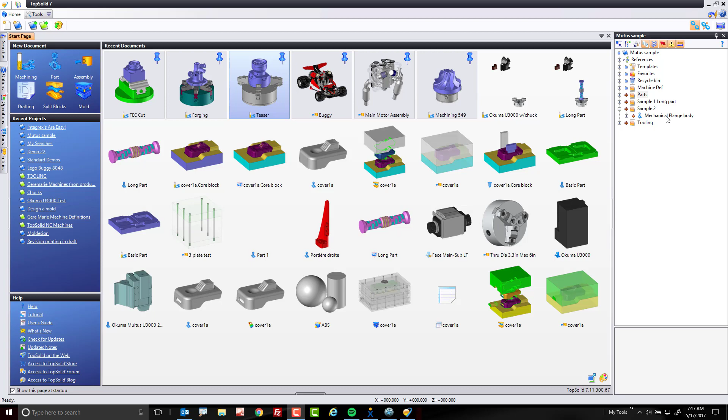Welcome to TopSolid 7. In this video, we are going to look at programming a part on an Okuma Multus U3000. The part in question that we're going to program is going to be this mechanical flange body. You can see there's operations all over the place that we have to deal with, and we're going to do our best to program all of these operations live together.

The first thing that we want to do with this part is we want to create what's called a machine part setup document. In a machine part setup document, this is where I get to tell TopSolid what the part to cut is and what the stock condition of the part is going to be. In this case, I just want a simple piece of cylindrical stock, and I'm going to add a little bit extra material on the left side. Perfect. I'm going to save my work.

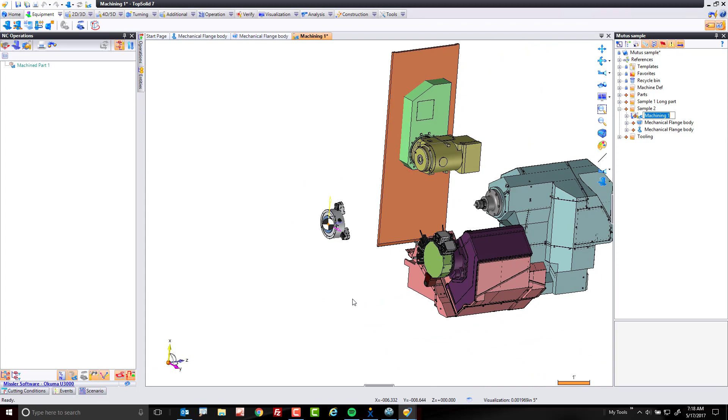Next, I'm going to start a new machining document. Here I'm going to choose my Okuma U3000 with chuck template. When I do this, you're going to see that my CAM file opens, and in here is my Okuma U3000. Now in this case, I've done a little bit of prep work ahead of time. I have my standard holders that I use already on the machine. I have some turning tools and some of my turning holders for my milling holders down here. I have them empty, waiting for the tools that I need to use.

Cool. Now I'm going to zoom up here on the chuck, and we're going to take this mechanical flange body, again the machine part setup file for those of you watching at home, and we're going to drag and drop it into the model. I'm also going to use stock faceted mode here because it's just a little bit faster on the calculation. I'm going to position this off of that axis there. Perfect. I'm going to take that to this plane right here, and we're going to go ahead and offset that as well. Let's go back maybe that 1/2 inch. Perfect. That looks good. Maybe we'll go even a little bit more.

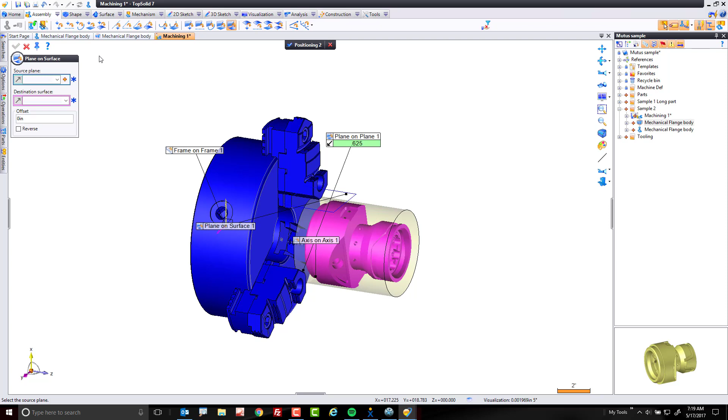How about 5/8? Nice. Now, from there, I'm going to take my plane here to this face. That'll close the jaws. And the last move I'm going to do is I'm going to orient that face to my x-axis. This way my part is positioned exactly as I need. Nice. Like that, we're now ready to start machining this part.

In this first step, we're going to start by turning down the front face of the part. To do this, I'm just going to select the front face of the part, right mouse button click, and choose roughing from the turning section of my contextual menu. Once I do this, TopSolid's going to generate what we call the spun profile. Here it's going to calculate the real turning profile automatically for you. Depending on the part complexity, it may take a second or two, but now we have it.

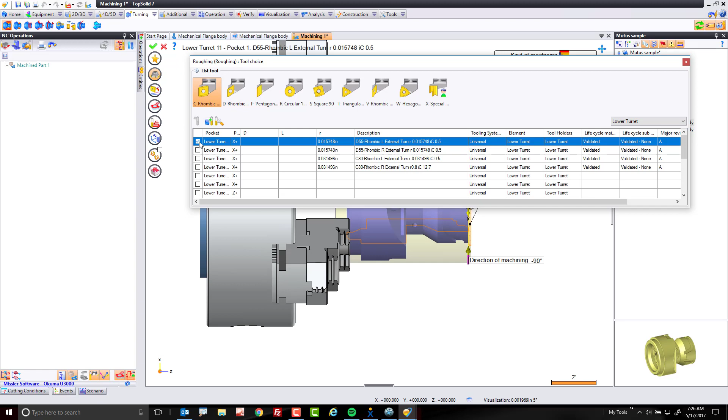Now here it also chose a neutral tool in my B-axis upper turret because why not? We haven't done any operations yet, it doesn't know really what we want. So here I'm going to change to our lower turret, and I'm going to choose this first tool. Now that I have the tool selected, I'm going to click my tool button here. I'm going to flip this down a little bit so we can see. And now you can see a preview of the tool path coming in.

Next, I'm going to change my depth of cut. Maybe I want to take a 30 thousandths depth of cut. Nice. Just double click, make the setting change, let the tool path regenerate. Maybe I only want to leave 10 thousandths to finish later. Cool. Again, double click, make the change, let the tool path regenerate.

Let's go set some feeds and speeds as well. Here, for example, I want to work in constant surface feet. So I'm going to work at 750 surface feet and how about a 15 thousandths chip load. And I'm going to set my maximum spindle speed for this to be maybe 3,000 in this case. And like that, my roughing is now complete.

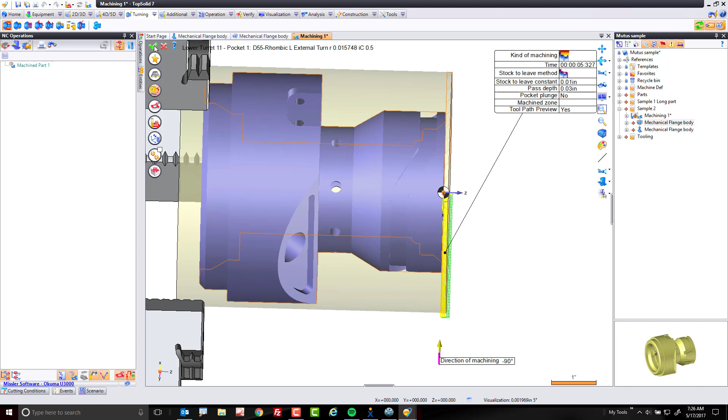The next step is to let the software go into a simulation mode. And here you can see we've indexed the turret and we're bringing that forward, and you can see the first roughing cut is complete.

Okay, the next step, what we're going to do is get out of the simulation from the previous step here, and we're going to go ahead and turn down the length of the part. Now, when we do this, we're going to use the upper B-axis. Not for any other reason than we can, and to show you different ways of working within TopSolid.

So I'm going to start by selecting the face I want to start turning at, and then using the Alt key on my keyboard, I'm going to select the end face that I want to finish turning at. And I'm going to right click and go to roughing. Now, what TopSolid's going to do in this case is it's going to pick up the roughing, it's going to pick up our tool, and it's going to generate our preview.

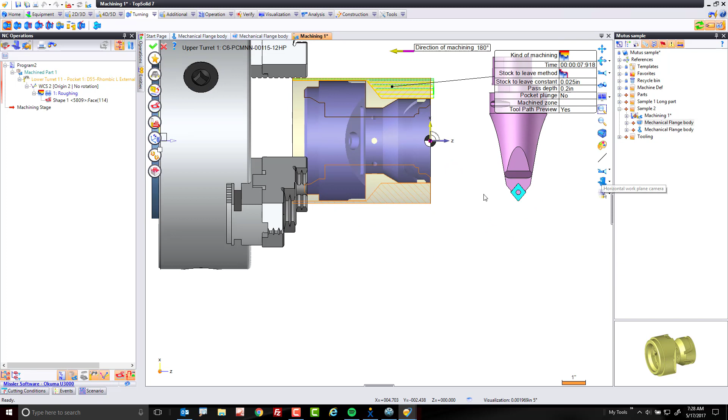Now let's look at our preview for a second because this is kind of neat. Here what's going to happen is we are going to turn down the part, and notice based on the tool orientation, this is showing the real condition of the part. From here, what we want to do is we want to maybe take this B-axis head and rotate it 45 degrees. Nice.

So to do that, I'm going to come into my comment section. And down here, these are just standard angular solutions. You can see as I click this, it turned the tool to have the insert facing the other way. Maybe what we want to do is set this at 45 degrees instead. So let's hit New Angular Solution, and let's go to B, and let's just simply type 45.

Maybe I want the insert facing forward in this case. Maybe I want it facing back. The choice is yours, and every change you make, you get to see dynamically over here to the right. And the reason we get to see this dynamically is because in this option here, I have Show Machine Preview in Position activated. I'm going to green check mark that.

Once I validate this, now the software is creating the angular solution required to do turning with my B at 45 degrees. Now we have another thing that we're going to have to do here as well. We're going to have to make sure to set the correct driven point of our tool. But first, let's look at our updated tool path. This is looking good. Now I'm going to go into my settings or my cutting conditions here. Of course, I'm going to reuse the same cutting conditions as before.

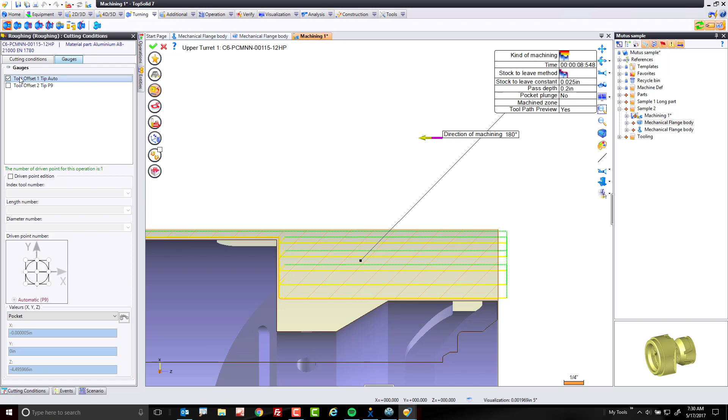So let me show you a quick trick for that. I can just drag and drop that over to here. That's going to copy all the cutting conditions. And from there, I'm going to come into my gauges. And now I'm going to do some magic here. And what I want to change basically is this. You can see how the tool is, and you can see where my cursor is holding onto the tool.

I want to change the driven point of the tool because I need it to be that theoretical intersection of the cutting edge in X and in Z. To do this, I'm going to start by duplicating the driven point and changing to my duplicated point. The reason I do this with a duplicated point is this way I always have the standard system points available to switch back to whenever I need to.

Okay, in the next roughing step, we're going to go ahead and rough out this area here. To do that, I'm going to zoom up, select my starting face, rotate my part a little bit, hold the Alt key, select my ending face. Right click, roughing again. Now, to start with, the software is of course going to try to rough it with the previous tool, which is that neutral tool that we had at 45 degrees.

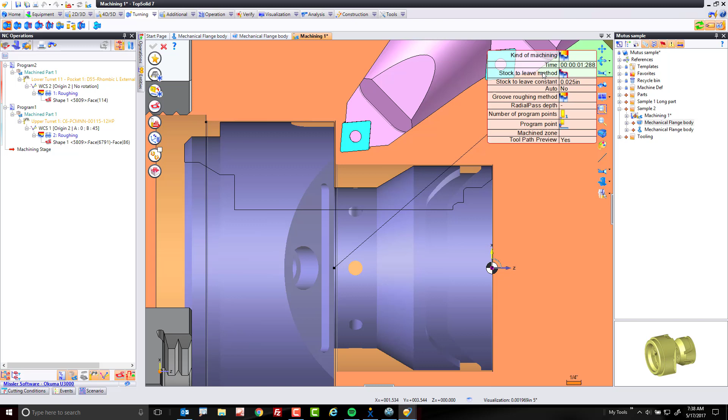Now, here, what we're going to do is first switch to the groove roughing method up here. And now I'm going to switch tools as well. When I switch tools, I have another tool already in here. This is my standard 4mm groove roughing tool. Go ahead and look back. Now, the software is maintaining that B-axis angle for us.

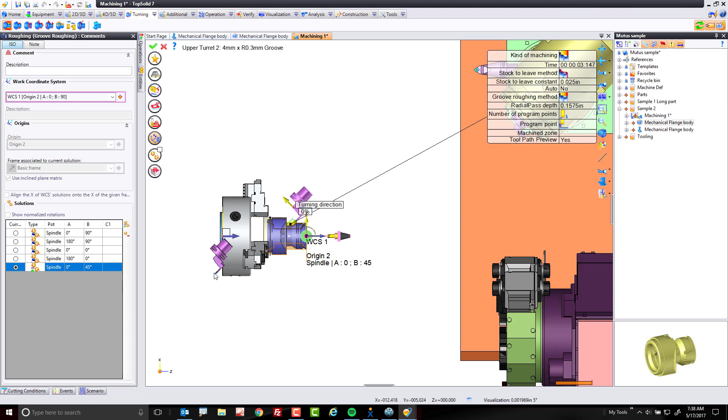So we're going to come into here first, and now we're going to set some options. I'm going to zoom back out here for a sec, and I'm going to look at being with my B at 90 and my A, or orientation of my tool, at 180. You can see it here like this. This way, I'm using the tool offset to the correct side automatically.

Next, I'm going to copy my feeds and speeds. Again, I'm going to use something similar, so why not? I'm going to copy those over.

Let's go look, make sure everything came in the way we want. 750 surface feet, 0.015 per rev, max RPM of 3,000. If we look at our gauge points, we have a left and a right gauge point because it's a groove tool. That's perfect. We can come in here and we can play with any type of groove roughing we want.

Now, we can use multiple control points. Okay, I can program with the left point and the right point. I can drive only by the left, only by the right. Of course, the choice is yours. If I go to the strategy tab here, I can choose the type of roughing methodology we want, including trochoidal roughing. Why not? Let's have a look at that option.

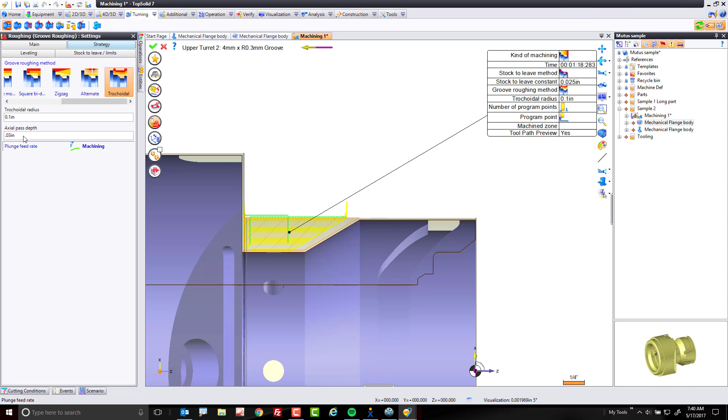With trochoidal roughing, I'm going to go ahead and set my radius and set my axial pass depth. Maybe here I only want to take 30 thousandths depth of cut. If I zoom up on the tool path, you can see it's going to lead in, it's going to cut, come back, and it's basically going to keep that tool engaged in cutting in a continuous fashion. Perfect. Like that, this operation is done. Let's let it update the stock model, and let's maybe take a look at the simulation.

Cool. Now, as I zoom out here, you can see the tools coming in. Now, during a simulation like this, what's important too is the chuck, right? So if I look here, I can actually turn on the rotation of the chuck. And why would we do that? We do that because we want to see if there's going to be a collision at that moment of turning, right? So let's turn this thing on and let's see what happens here.

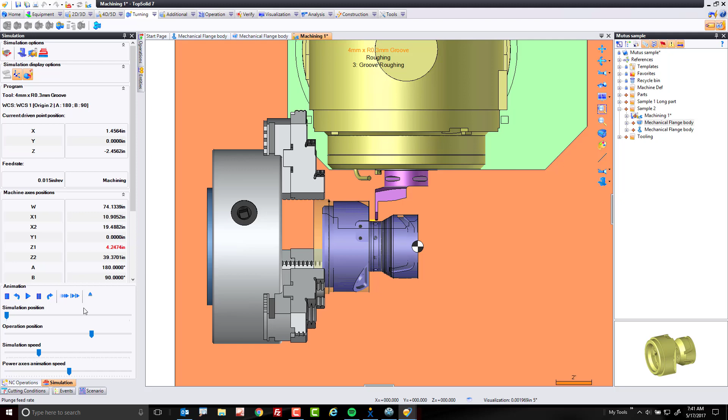So we're coming down, we're looking, and that gets close, and I'm going to go ahead and pause it. That gets close, but it never actually hits. Pretty cool, huh? If it did hit, this software would tell us about the collision. Awesome.

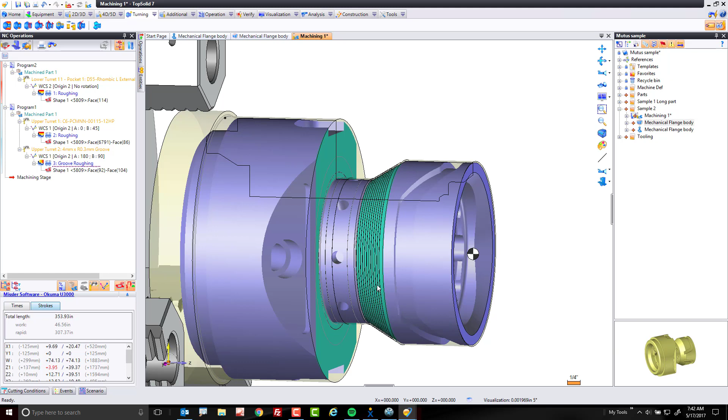Welcome back. In the next step, we're going to go ahead and finish this groove. I mean, we have the groove tool in the spindle right now. Why not do that? So here I'm going to, again, select, Alt select there, and here I'm going to go down to finishing. Now, just to be different, here's what I'm going to do. I'm going to change the type of finishing we want to profiling. Okay, and here you can see again it grabbed that tool, but just to play with the lower turret, I'm not going to use this tool.

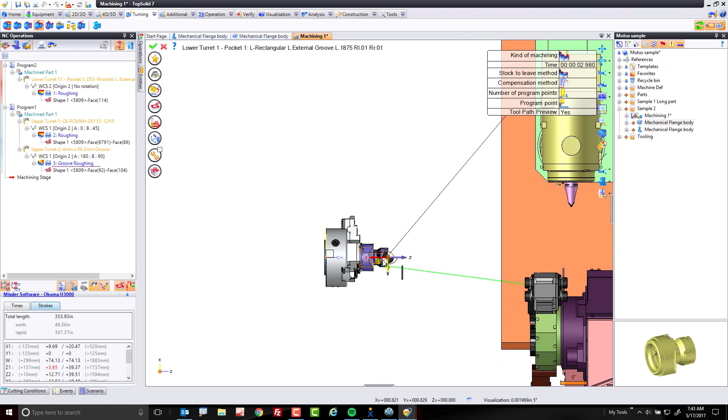Instead, I'm going to come over to my tool settings. I'm going to say, you know what, let's use our lower turret. And in my lower turret, I want to use that tool there. And of course, that's going to be the tool on the left side of my turret, and it's going to come in this way. Now, the tool path is offset here because on the machine, this is a slant bed lower. So what we would need to do, let me turn off the tool display here, is if we look at this, we can rotate down and you get a better idea of what's happening.

Now, in this case, what I'd like to do is easy to understand. I want to program from two directions at once. So the tool is going to lead in, come down, come off, lead in, come down, come off. Cool. And from there, I also want to program by 2 points. Why not? This is for highly accurate tool path.

Let's go set our feeds and speeds as well. Again, we want constant surface feet. Here I'm going to go up to maybe 800 surface feet, and I want a nice finish, so 0.005 per rev. I'll let this thing max out at 4,000 RPM. And we're done. And again, we get to see that simulation. Here the lower turret is indexing. It's going to approach, right? And now it's going to do its thing. And you can see the perfect little cut. Nice.

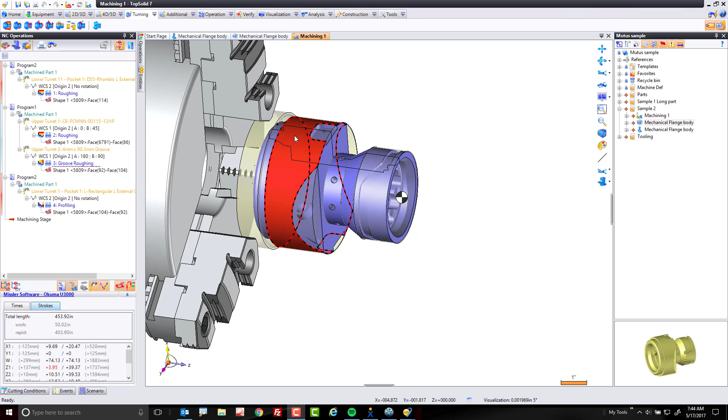Okay, in this next operation, we're going to go ahead and finish turn this front face, and this face. Okay, so here's what we're going to do. I'm going to start by selecting this to here. I'm only going to do that to begin with, and you'll see why. I'm going to go to finishing. I'm going to go ahead and set myself back to the B axis of 45 because I want to go back and use our B axis. Why not? Now if I look at this in turning view, you can see good, looks good.

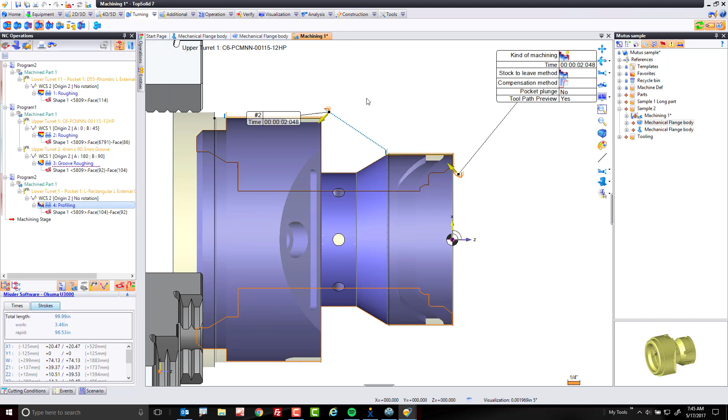I'm going to go to my geometry selection here, and I'm also going to add to it this face. Why not? So here I'm doing my cut, I'm coming in, doing my cut. I want to use similar feeds and speeds as that, so I'm just going to drag and drop them, and life is good. Like that, I've now finish turned everything. And again, we go into the simulation, everything's going to come down, and away we go. Nice.

Okay, so at this point, we have done a lot of the turning of this part, right? We've used the upper turret, the lower turret, we've done a few operations, and now what I'd like to do is I would like to check how all of this is going to look, but with synchronization. And that's the important point here. So what I'm going to do is I'm going to switch to the final machining stage, and now I'm going to bring up my scenario down here.

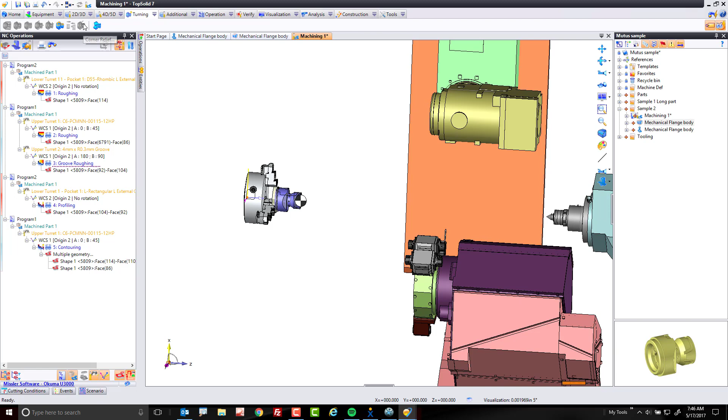Now, if your scenario is not visible, like mine is, you can always turn it on by going to your 7 icon up here, going to view, and activating the scenario. Now down here, these are all of our various operations. Now here is the piece of awesome that I'm going to show you. I'm going to right click in here and choose automatic layout. And like that, TopSolid has now set all of the synchronizations dynamically.

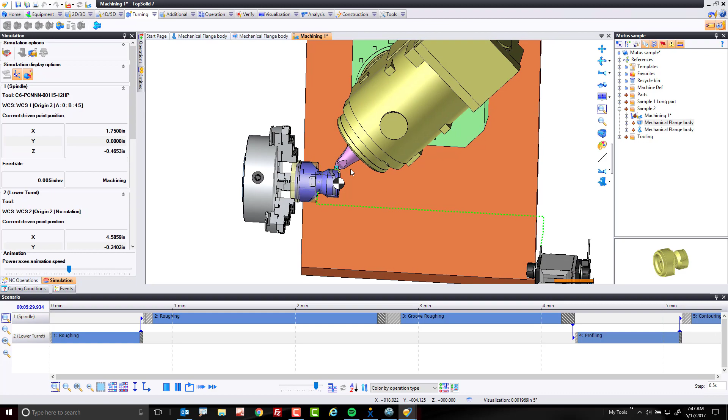So now what we can do is we can just hit play. And when we hit play, you can see every operation that's going to happen in the order in which it's going to happen. And we can speed that up, you can slow it down, you can do with it as you want, you can rotate, pan, and zoom during the whole process. Everything is good. There's my groove roughing, nice. Here is the groove finishing, and here is my finish turning. And like that, our synchronizations look good. I would say that's a successful test.

All right, now that we have the majority of our turning done, now what we want to do is we want to go ahead and do some milling. And maybe the milling features we're going to do are a little bit different. So what I'm going to do first, I'm going to minimize my scenario. I can always bring it back. I'm going to switch back to machining stage, and I'm going to continue working on this part.

Now, to begin with, what I want to do is I want to mill out some of these features here. So I'm going to start by just selecting this face here, right-clicking on it, and going to end milling. Now, when I do that, the software is going to find the area to machine. It's going to propose it as an open pocket, which makes sense because guess what? It's an open pocket. And now we need to go find a tool.

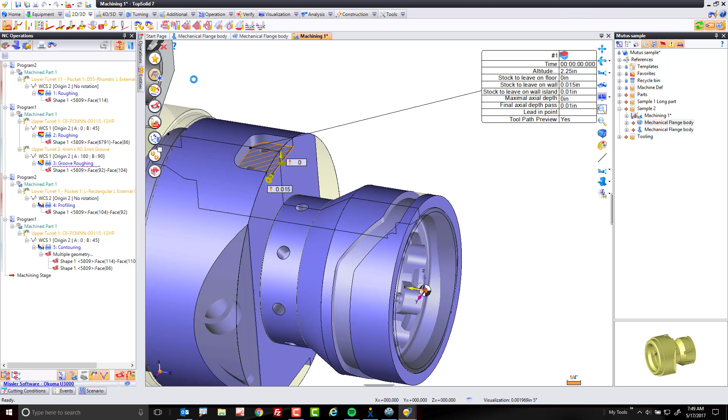So I'm going to build a tool on the fly again just to show how simple it is to work with tooling in TopSolid. Here, I want to use this style tool, or maybe, you know what, I want to choose from a template. Maybe I want to use this style tool instead. So double click, perfect, that's done. And now here what I want is, how about a 3/8 diameter end mill? That looks good. Maybe here we want the 3/8 diameter end mill to have 3/4 of an inch of flute. Maybe it's 2 3/4 long.

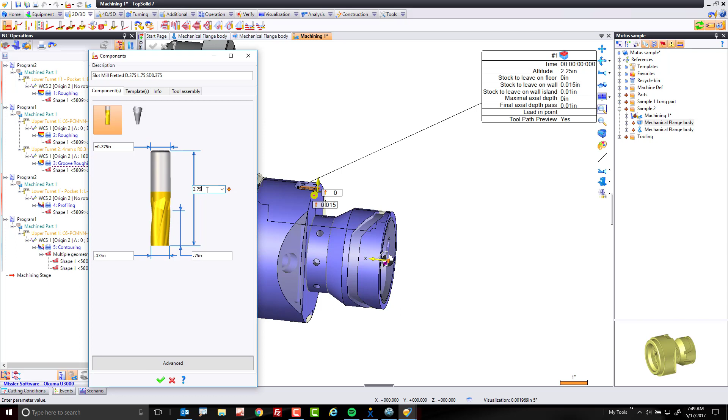If I go to my advanced settings here, maybe this is a 4 flute tool. Great. I can go here and I can make changes to this as well. But most importantly, I'm going to come here and I'm going to play with my gauge distance. This is how far that tool is going to stick out. For example, here I want this to stick out 1 inch by default. Perfect. Let's go back to here really quick and let's maybe set some values for our holder, and you can see you can set this in any order you want. You can play with this all day long and then click OK and you have your tool.

Awesome. Now as soon as we have our tool, of course since it's TopSolid, we have toolpath. So let's make some changes here. I'm going to go make some feeds and speeds settings. I'm going to say, you know, I'm going to run this at about 3,500 RPM and 50 inches a minute, maybe some jet coolant. That's awesome.

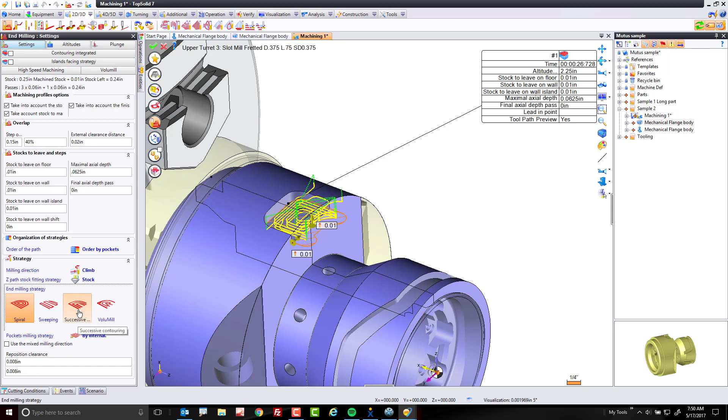I'm going to come down to my settings here and I'm going to set this to be maybe a 40% step over, and maybe we want a 1/16 inch depth of cut. Cool, why not? Don't need a spring pass. And maybe here we want to leave this with 10 thou stock on the floor, 10 thou stock everywhere else. Awesome. Like that, everything is good to go. Maybe last step I'm going to make is I want to use successive contouring. Cool. And away we go.

And like that, TopSolid is going to update the stock model. We're going to see our simulation. It's going to rotate the B to the right angle. It's going to approach. I'm going to speed that up a little bit. Notice in this case, the spinning axis is the tool. Kind of cool. That way we can check even when the tool's spinning for collisions. Kind of nice. And away we go.

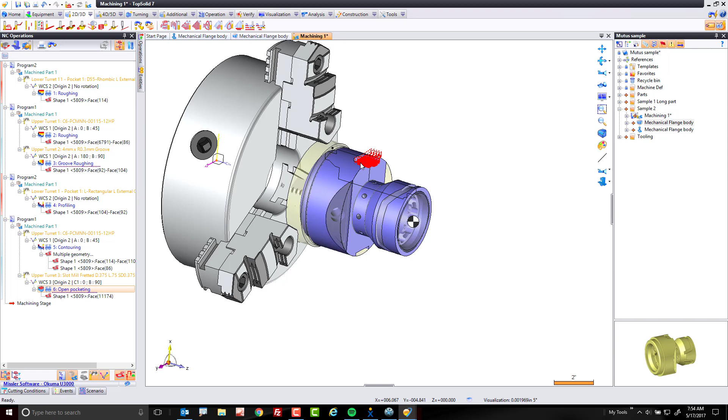Welcome back. In this next video, what we're going to do is take this toolpath and apply it down here. But how we're going to do that is going to be kind of cool. What I'm going to do is hold the control key down on my keyboard and just drag and drop that down to that face. When that happens, the software automatically finds the correct angular solution and creates the toolpath. I mean, that was easy, right?

Let's drag and drop onto this face and see what happens. Here now the software is going to check against the kinematic definition of the machine. It's going to find the angular solution and it's going to create that toolpath. You know what? While we're here, let's rough out that pocket as well. I mean, why not? We have the end mill in the spindle. Let's do it. So now we have the pocket of that angular solution.

And then next, let's take that toolpath, bring it over to this incline face. Cool. And then of course, we're going to drag and drop it onto the next face as well. And really what I want you to pay attention to is the fact that I've just programmed 5-6 operations in a matter of a few seconds on a 5-axis mill turn machine without worrying about anything. I mean, that's just awesome, isn't it?

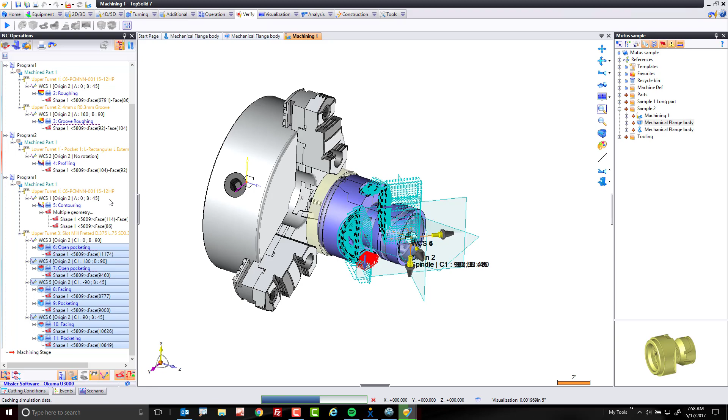Welcome back. In this next video, we're going to verify the toolpath that we just created. Now, in TopSolid, when you go to verify, there's a couple ways to work. First of all, I'm going to just window select all the operations I want to verify. I can right click on it and choose verify. What's going to happen is kind of cool now. We're going to load into verify, but our verify is a bit cooler than most softwares because our verify also includes the full machine simulation. And you notice it was one click to get into.

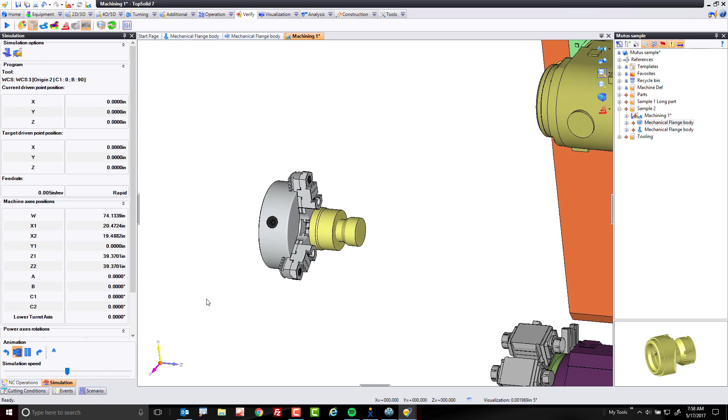The other thing to notice is the stock is coming in at the exact moment it would based on all the previous operations. Kind of fun. So let's hit play and see what happens. Now, if you don't see the machine in your verify, it's just because you don't have machine simulation mode active up here. So just click that button and away you go. And here now, you can see everything happening in real time.

And here, there's your pre-position move. Maybe I want to speed up the simulation a little bit. Cool. Now we're rotating, doing our thing, doing our thing. Perfect. Everything is seen in perfect simulated environment with zero collisions, zero problems, ready to go.

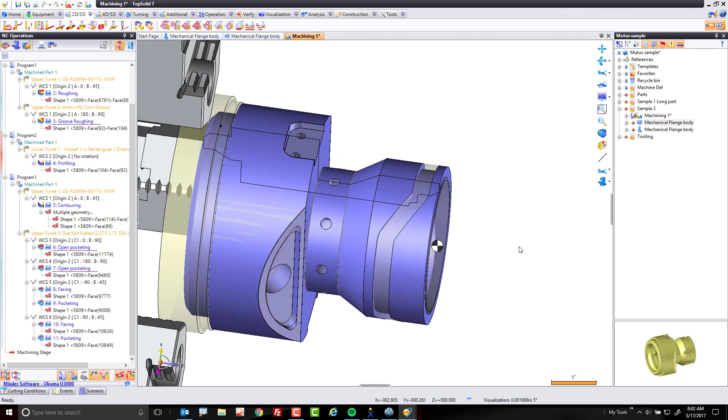Welcome back. All right, the next milling operation we're going to work on is going to be this 4-axis slot. Now, a lot of times in CAM softwares, they make machining harder than it really needs to be. I mean, if you think about it, a 4-axis slot is nothing, and it should be nothing. Now, here's how it works in TopSolid. You're going to select the face to machine, right click, and go, yes, under 2D to end milling, because it's still just an open pocket, isn't it? So I'm going to go to end milling.

Now, when I go to end milling, first thing I'm going to do is come in here and turn on multi-axis. Now, multi-axis became available because of the definition of the machine. The machine knows we can do 4-axis work, so TopSolid is exposing more functionality. Here, I'm going to switch to 4-axis radial mode, and as soon as I do, boom, I get some toolpath. Awesome. Now, here I need to go in and change my tool because, in fact, this tool just is too big to work on that part.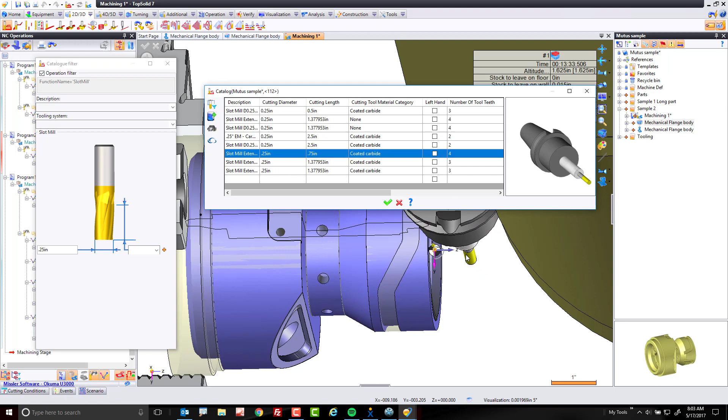So I'm going to come in, use slot mill, double click, and I'm going to search for a different tool. I want to use a 1/4 inch end mill. And here maybe I'm going to use this one here, nice little extension tool. Perfect. We'll go ahead and validate. And like that, you're now going to see the wrapped toolpath. Now, what's even cooler than that is, again, how quick everything is happening.

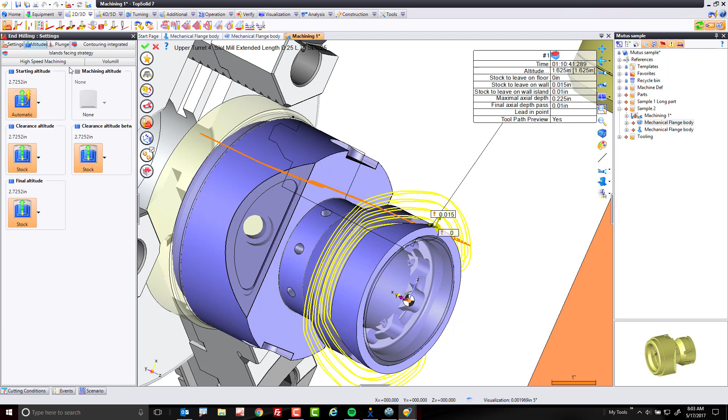Now, here's one little thing. You can see here it generates all the toolpath, but TopSolid doesn't know where to start with the toolpath, so we go all the way to the extent of the part. So here, you still got to be a little bit of an NC programmer. We're going to come into the Altitudes tab, and all we're going to do is change our starting altitude to be at a specific point. And what point? I'm just going to zoom up, and I'm going to find one of the endpoints here of the profile.

Like that, it's now going to measure that radially. I can come in and set my depth of cut, my step over depth of cut. Maybe I want this to be 60 thousandths. Maybe I want to leave 10 thousandths here, and maybe 10 thousandths on the wall.

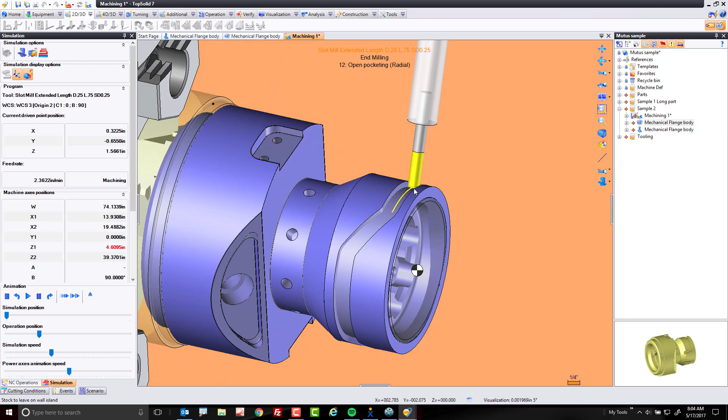At the end of the day, we've now successfully made a 4-axis toolpath. What's even cooler is that, of course, we simulate everything, so you get to see exactly what's going on and how. Notice it's plunging off the slot in the open area automatically, because that's just the right way to cut a feature like this. And the best part is you didn't have to think hard to get there.

Okay, next we're going to move on to some ID work. Before we do that, I'll go to my turning tab and turn on a really cool feature called part display. Here I'm going to enable turning preview, and set that to 90 degrees because I still want to see my finished part as well. Like that, I can now see the inside of my part.

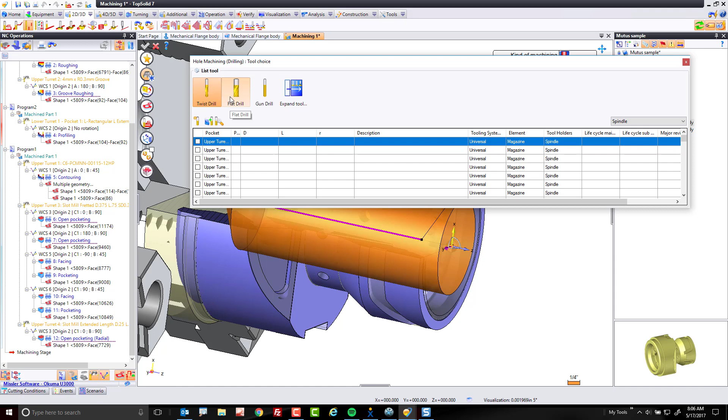So here I want to start by drilling down the center of this. I'll right click on this and go to hole machining. Right now it says this is a 2-inch bore. What I'm going to do is look for a flat drill, and maybe we'll build one. Why not? My flat drill - I don't want 2-inch, I want 1 3/4 inch. Okay, yeah, 1 3/4 inch is good. If I look at this straight on, that's got enough flute length in it, right? And that's going to go right to that depth, and that's good enough for me.

Perfect. Now, from here, we need to program it, right? So I'm going to set how I want this to work. Maybe I want this running at 500 RPM and 15 inches a minute with through-the-spindle coolant, so I'm going to turn on through-center coolant.

Next, I want to choose what's spinning - is the part spinning, is the tool spinning? You have the control right here for that. If I leave it like this, the tool is going to spin. If I choose this, the part is going to spin. Or I can double my feed rate and choose both the tool and the part. Now, this is specific to your machine - if your machine allows you to do this, great, choose it; if not, choose one of the others. In this case, I'm going to say this is a static boring bar and I want my part spinning. Like that, I'm going to click OK.

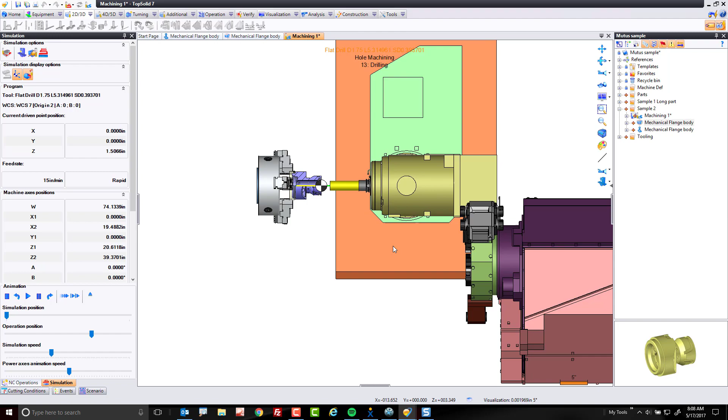And again, we're going to come in, do our thing, and come out. Now, maybe you're noticing that the way this approached was not very safe, because it's getting really close to our turret here. The turret was still safe, but maybe you want to change that approach move, right?

So here's what we're going to do. In the next video, I'm going to show you how to edit a link movement.

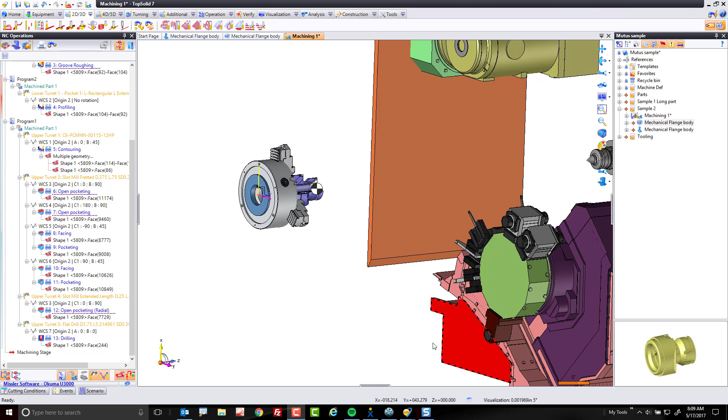Okay, now on the last cut, let's watch the simulation here. You're going to see that this is going to come down, right? And it looks like it's getting close to that turret, the lower turret I should say. If I pause that, you can see that it doesn't actually hit it, but it's enough to make most operators cringe. So maybe what we want to do is approach with the B-axis up here first, then come down. So how do we change that in TopSolid?

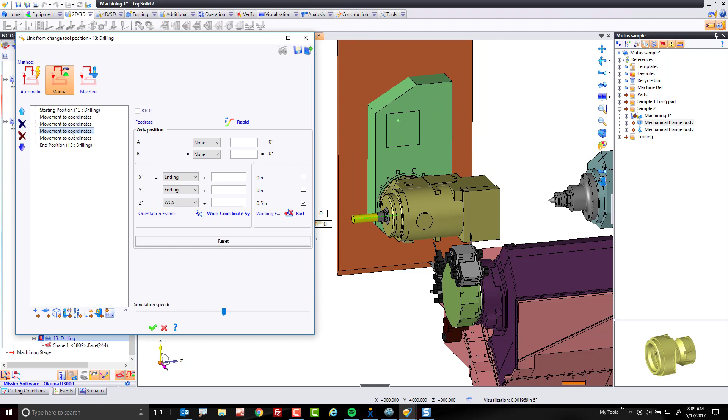Well, thankfully we have something called link movement editing. So here I'm going to right click on the operation, go to link movements, and say edit approach. When I do this, I'll turn off automatic mode and go to manual mode. Now here is that first move - it's setting A and B correctly. The second move is moving this down, then moving over, and when we move over, it's moving to a rapid plane. So why don't we just move that one up? Yeah, it was that easy.

Again, orient the part, approach in Z, approach in X, and finish. That was nice and simple - we didn't have to think too hard. Now if we simulate, way better approach move. And again, it's you that had the control to tell TopSolid what you want to do and how.

Okay, next I want to do some ID turning. Now in this case, I need an ID, and I need a turning tool that can reach down the length of this part, right?

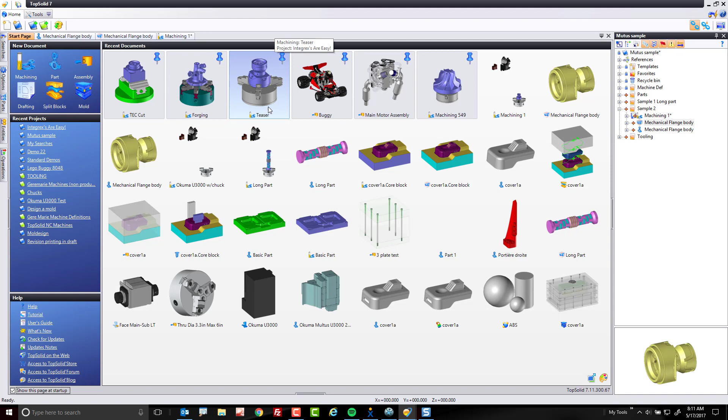Now I remember that I used this tool on a similar part in a different job. So instead of going through my database and hunting for the tool, which of course you can do, I'm going to go back to my start page and load the project where I know I have the tool already. Here I have one called teaser. I'm going to double click and lo and behold, it's the same part. The only difference is instead of it being on an Okuma, it's on an Integrex.

In this case, what I want to do is go to my tool manager. I'm going to find the tool in question. I'm going to make sure it's the right tool by turning it on visually. Yep, there's my tool I want to use. And here's what I'm going to do: I'm going to right mouse button click on it and choose copy. I'm going to hit the green check mark here.

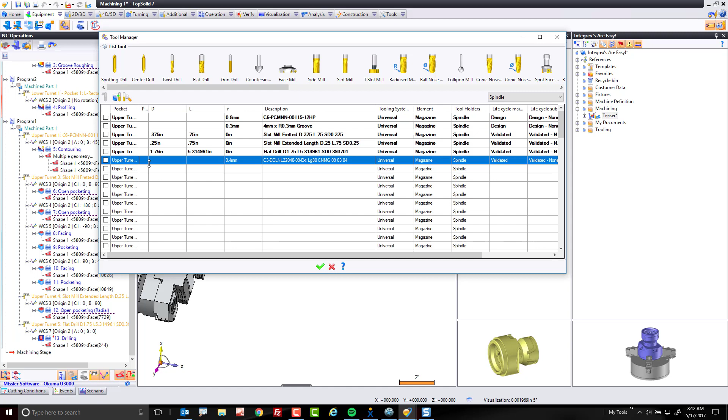I'm going to switch back to my current CAM project, go to the equipment tab, go to my tool manager, make sure I'm in the right place. I want to be on my spindle. Okay, and go to the next available pocket and choose paste. I'm going to choose no to that because I don't care about it being in the same pocket. And like that, my tool is now in this project ready to use.

Last thing I'm going to do, go back to this part and I'm going to close it because I don't need it open anymore. And like that, you just learned how to reuse tooling made in a different project and bring it forward into another project.

That was easy. Okay, next we're going to go ahead and do our ID turning. To do that, I'm just going to zoom up here, and I'm going to put myself in a turning view because it's just more fun. I'm going to choose this face, hold my Alt key down, choose this face, or right mouse button click.

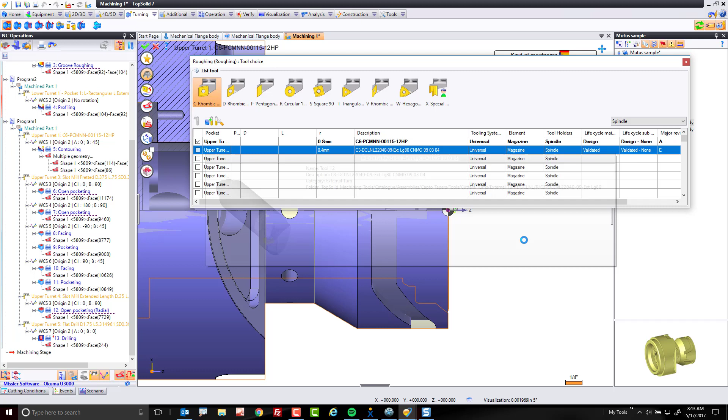And I'm going to go to roughing. Now, when I do that, it's going to grab my neutral tool in my B-axis because that was the last time we used it on the B-axis, and then we're going to have to go and choose the tool we want to use. So let's go to here, and let's switch to this tool. As soon as we switch, we're going to see better visualization, and of course the software is going to find the right area to machine.

Now, the other thing we want to do is set our B-axis angle, obviously, to be horizontal. So we want the B to be at 0, the A to be at 0, and we're good. Now, in this case, the software sees all the material, right?

But we don't want to go all the way through there because if you look by this tool, we can reach about to there. So that's exactly where we want to stop it. So let's go to our settings, and we're going to set a limitation point, similar to what we did on the first as well.

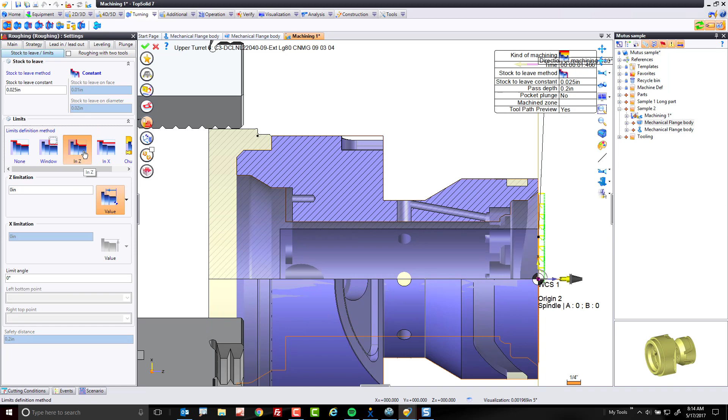So we'll go to stock to leave and limits. I'm going to switch to in Z. I'm going to pick a point, and maybe I'm going to start by using this same point. Let's see what happens. If I turn that off and bring the tool back, that's still a little bit too deep, isn't it? No big deal. Let's go back to here and pick a different point. Maybe I choose this point right here. Let's look again at the visualization. Oh, that looks good. I feel good.

Next, what I want to do is set my feeds and speeds and move on. So again, I'm going to use constant surface feet. Why not? Here I'm going to use maybe 600 surface feet, and I'm going to use 10 thousandths chip per rev and 3,000 RPM, and like that, we're done.

And we have perfect toolpath. Nice.

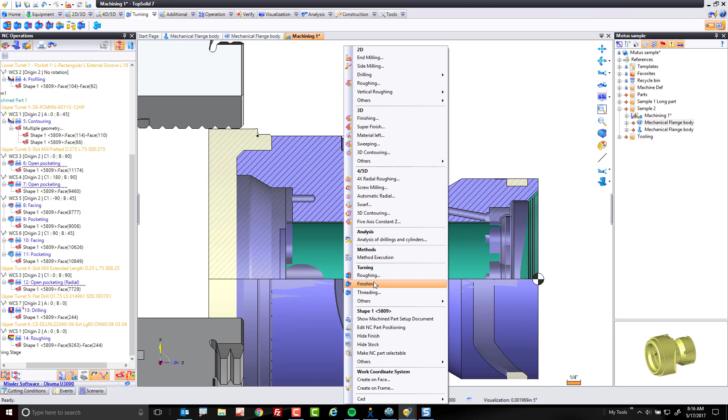Okay, from here what I want to do is finish turn the ID. So again, same tool, select the start face, select the end face using the Alt key, and I'm going to go to finishing. In this case, tool is going to come down, do its thing, and come off. Perfect. I'm going to use similar feeds and speeds, so I'm going to copy this to here. The only difference in this case is, you know what, I want a nicer finish, so I'm going to go to 5 thousandths, and that's it.

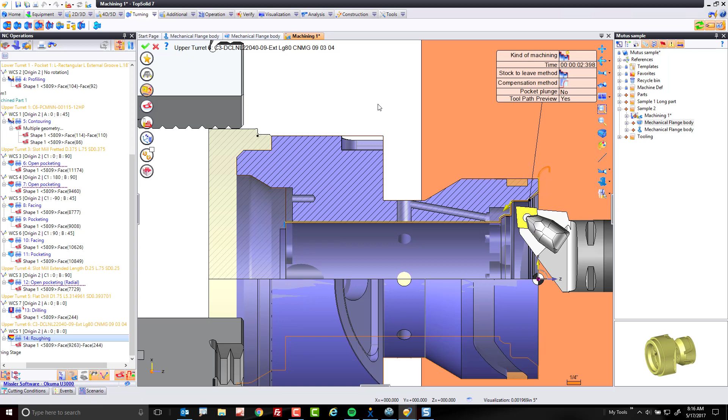And now it's going to come in, do its thing, and oops, look at that. That was a bad retract. Shame on TopSolid. Well, even our software gets it wrong from time to time. But if that happens, no big deal.

Go to Link Movements, let's edit the retract. Let's go into here, turn off automatic, go to manual, and check it out. Boom. And I bet you that sends Z home next. So guess what we're going to do? We're going to send Z home first, and then the rest. Again, you're always in the driver's seat. You always get to control TopSolid how and when you need to.

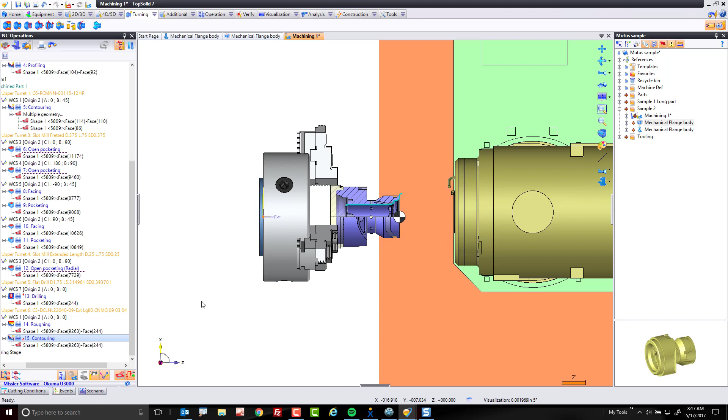Okay, from here what we're going to do is some ID milling. So let's go have a look in here. What I want to do is select this face here, and go to end milling. When I do that, the software is going to grab the last end mill that we used, which happened to be a 1/4 inch end mill. Perfect. Now here, I'm going to leave this at 0, and maybe rough this at 60 thousandths depth of cut.

Did you guys notice, by the way, that it is picking up every single ID pocket automatically for us? I mean, think about that. How cool is that? And if we look at this, this is great. This is doing everything in that pocket.

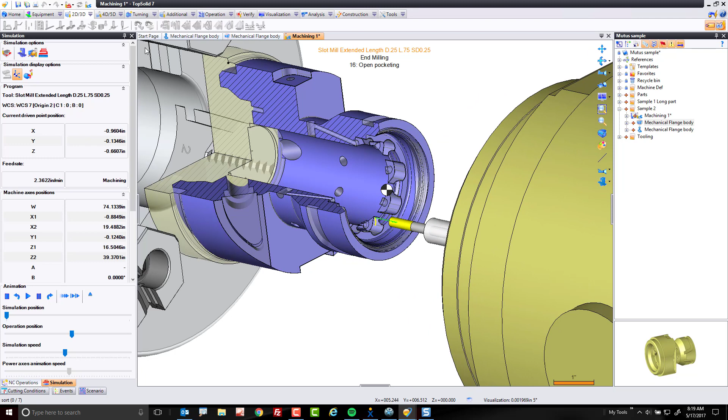Now, in some cases, on machines like this, doing that type of work is great, but you might get some over travels. Okay? It's because these machines maybe don't have the biggest Y-axis travels, or you can't go below X to a certain level, or whatever. In cases like that, what you want to do is switch from using XY machining to polar coordinate machining.

Okay, so all I'm going to do is go edit this operation, and we're going to go again to that multi-axis button. We're going to activate multi-axis. We're going to be 4-axis axial, and go to transformation from milling to turning. I'm also going to initialize the axis at 0 degrees, and that's it.

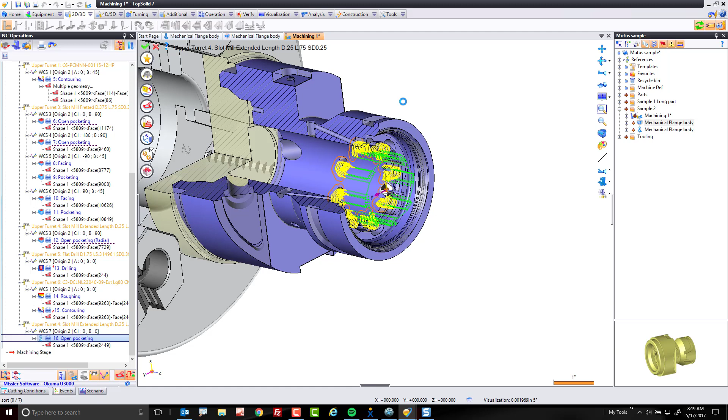Now we're going to use polar coordinate machining, let's have a look at what that looks like in simulation. Okay, so the toolpath is done. Let's go ahead now and run simulation on this. And now watch what happens. We're going to approach, we're going to do our thing, but this time something different is going to happen. Notice the C-axis is moving now instead of the XY axis. Cool. Again, you didn't have to delete the toolpath and start over. All you did is activate the command you were after. Very, very easy and awesome.

Okay, let's do some finish milling then. Why not? So just like we did before, I'm going to come in here, choose this face, and choose side milling. When I choose side milling in this case, it's going to go ahead and find the profile of everything again. I mean, awesome, right?

I'm going to do this at 1 depth of cut. Why not? But instead, maybe I want to take multiple radial passes. So let's do that. I'm going to come in here and say my first pass is going to be at, let's say 20 thousandths, and my final pass is going to be at 5 thousandths, and let's take as many as we need. Let's say 3, I don't know. And boom, if we look, it's going to take 3 passes.

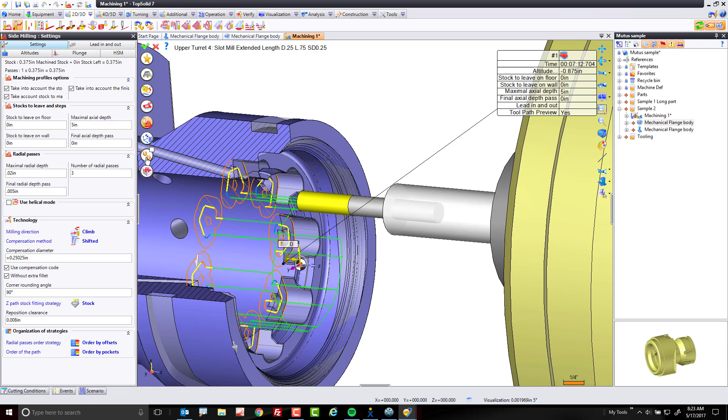Cool. Now, I'm going to use polar coordinates as well because I just like using polar coordinates for this type of machining. So why not set it correctly on the fly? Again, I'm always going to initialize that C-axis to 0 because it's just a safe thing to do.

And then I'll go ahead and set my feeds and speeds because, of course, we need feeds and speeds, right? So I'm going to say, this is going to be running at about 4,500 RPM and 50 inches a minute. I like that. Cool. You can also do it by chip load. Maybe I want a 5 thou chip load. Nice. Jet coolant. Done. Ready to rock. And yes, it is that easy.

We're going to go ahead and go back into our simulation. We're going to move on. And notice again, we're using the C-axis appropriately to finish all of these features. Now, in the next movie, we're going to do some 5-axis continuous milling.

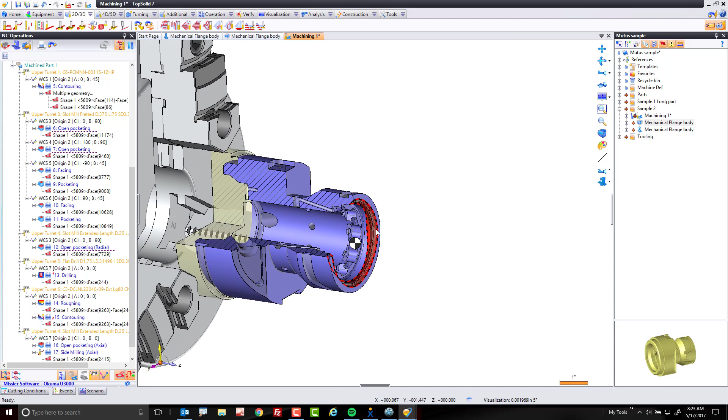Okay, in this next video, we're going to go ahead and learn how to do some basic 5-axis milling. Now, I want to be super clear here, guys. This is a demo part, so everything is perfect on my part. What I'm going to do here is I'm going to go to swarf machining. Up here, I'm going to choose the type of swarf I want. I'm going to use the last method, face machining. This is intended for simple face machining.

I'm going to select right here. You can see it previews the tool in position already. Perfect. If it was going the wrong way, invert it here. If you're going the wrong ISO curve, flip it there. Perfect. From here, all I need to do now is set my tolerances and my feeds and speeds.

So let's go ahead and set my feeds and speeds. Maybe this we're going to run at about 6,000 RPM, why not? And maybe at about 80 inches a minute. And we're going to use center coolant on this one. And then from here, I'm going to go ahead and say my maximum depth of cut here is going to be big.

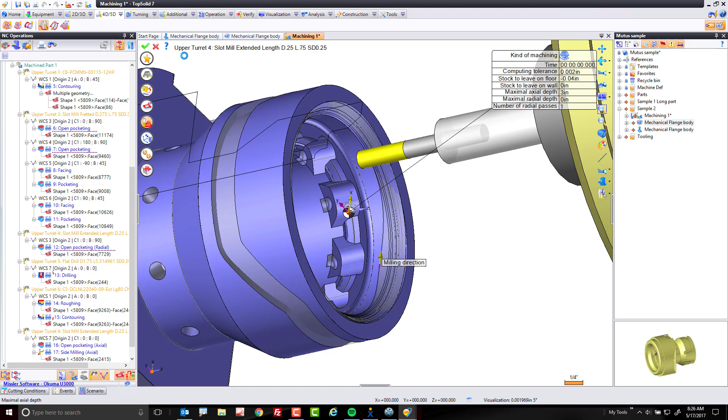My stock leave on the floor is going to be minus maybe 40. I want to stick out past the bottom of this detail a little bit. Stock leave on the wall is 0. Good enough. And we're going to hit go. And I'll watch what happens.

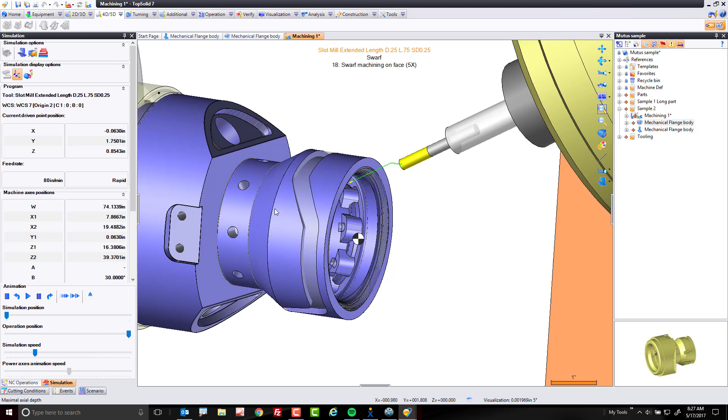Here we're going to come in. I'm going to slow this simulation down really quick. It's pre-positioning to where it needs to be. We're going to come it back in, and like that, you just did 5-axis swarf milling. Cool. Doesn't get easier than that, does it? We're done.

Okay, next we're going to do some more ID work here. We have these features in here. And just to be able to see it a little bit more cleanly, again, I'm going to go activate that really cool visualization tool, turning display. So if I look at this straight on, you can see we have this at some kind of inverted inclined plane. And the engineer who made this was nice enough to at least create a little flat face for us first. So let's go ahead and machine out that first, and then we can talk about drilling this detail.

So it doesn't really matter which one we start on. Maybe I'm going to start on this one. Let's start here and just go to end milling. Cool. Now, right off the bat, you're going to see that we don't see anything. That's because our tool is too big. Well, how do we define or decide what size tool do we need?

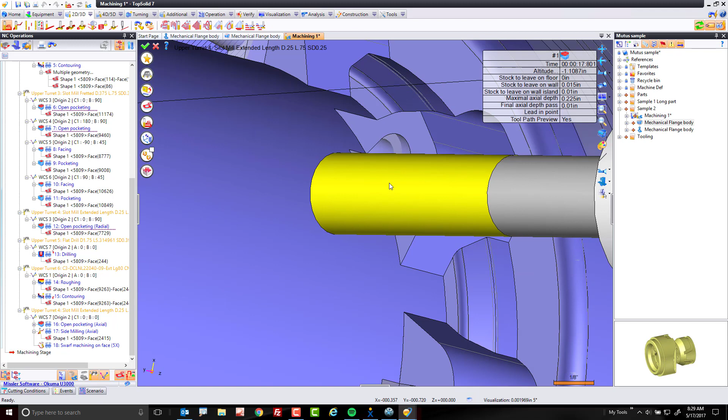Well, we can always, in the middle of any command, go to the Analysis tab, go to Measure, and go get the size. Maybe I just want this radius size. So that's a 3/16 diameter. So if we use an 1/8 inch end mill, that should be good enough to machine here. So let's go ahead and find us an 1/8 inch end mill.

Now let's see if I've made one before. So I'm going to set my filter, I'm going to come down to here, and I'm going to choose 1/8 inch. Perfect. And here we can see I have a nice 1/8 inch tool. I like it. We're going to click OK. And like that, we'll now have our tool path ready for that move.

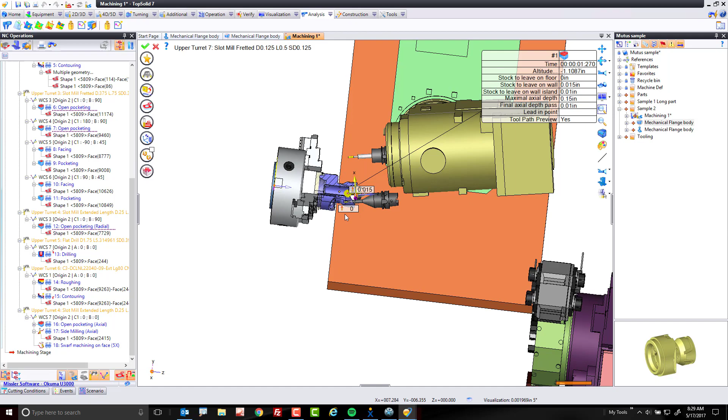Now, let's pay attention, because right here, notice that the angular solution the software found has it rotating to work down at the negative side here. Let's just click OK once, and let's see what happens.

When we do this, it's going to go obviously into the simulation mode. Now, let's zoom out. Let's watch the move. Here we're pre-positioning, right? So we'll speed up a little bit. Pre-positioning B, pre-positioning C. We're approaching, and we're doing our cut. Okay? That's nice. But there's another solution, and this is something that's awesome about TopSolid.

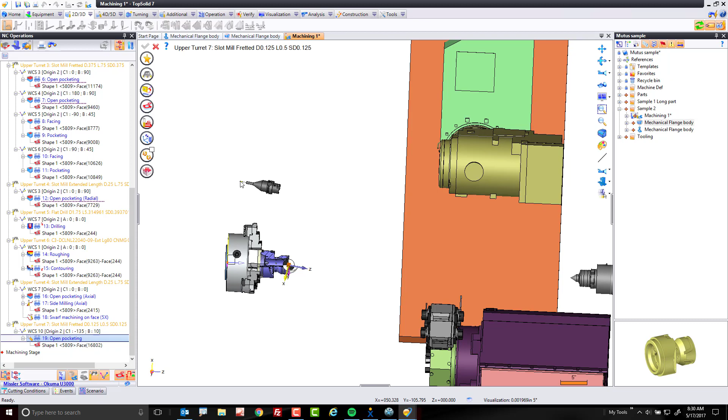TopSolid will give you every angular solution it finds. What do I mean? Well, first of all, we're machining with the tool in this orientation. If I go to my WCS solutions here, it's giving me the opposite angular solution as well. What does that mean? Well, let's click on it and take a look. Here now, it's going to flip C, invert B. Why? Because we can. Okay, let's look and see what that solution looks like.

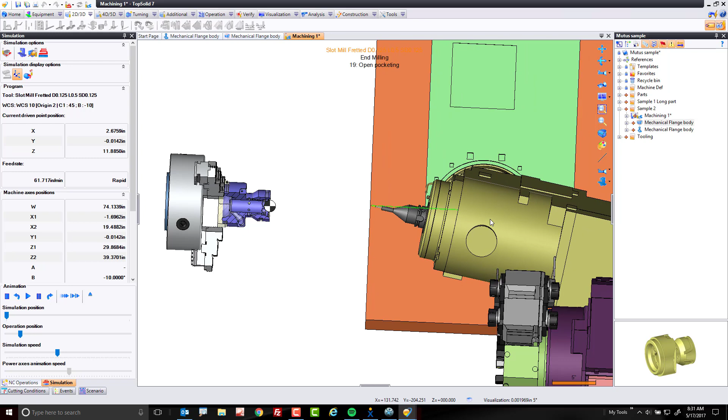Maybe it's the better way to work for what we're doing. Who knows? Let's run a simulation. When we run the simulation, now notice B is inverted actually. We're going to do our approach, and we're going to machine the part.

Again, it depends on who you are and what you're doing. It depends on the strokes of your machine, how far can you rotate these axes. But what's awesome about this is that TopSolid gives you every possibility that this machine is capable of doing. And it does it effortlessly, which makes your job a bit more effortless as well, doesn't it?

Okay, from here, now we're going to do something even cooler. We're going to use a repetition to repeat that positional toolpath. But the repetition that we're going to use is not repeating the toolpath. We're going to repeat what's called the WCS. The WCS stands for Work Coordinate System.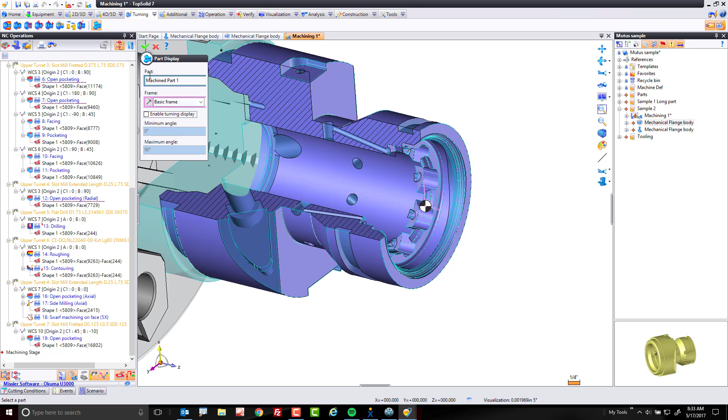Now, in this case, again, we want to take this toolpath, this inverted toolpath, and we want to repeat it 8 times. Now, again, to make the visualization simpler, under my turning tab here, I'm going to turn off part display. Next, I'm going to select the WCS, that angular solution, and I'm going to right click on it and go to repetition and create a repetition.

Next, the type of repetition I'm going to create is going to be circular, about my absolute Z, 360 degrees, with 8 instances. I'm going to turn off alternated numbering because I don't need this in this case. Now, you're going to see all those toolpaths. Cool. Like that, we have now made a repetition of everything.

Now, the software needs you to recalculate this toolpath. So you come up here and you hit regenerate. So we do the repetition, then we hit regenerate, then it updates the stock model, and like that, you have quickly machined all those features. The next video, though, you're going to see something even cooler than just this repetition.

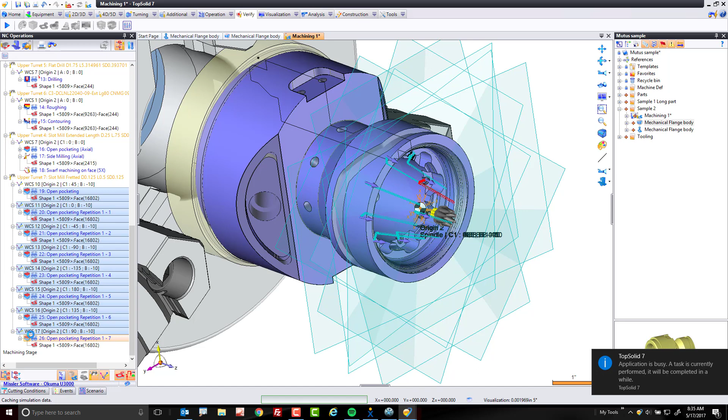So now the calculations are done. If you mouse over any of these, you're going to see all of these solutions. If you want, we can take all of these things quickly. I'm going to hold Control, select the Simulate button. That's a little hidden magic trick about sending something into Verify. Okay, and now we can run Verify on this. And now you can see it's doing its thing.

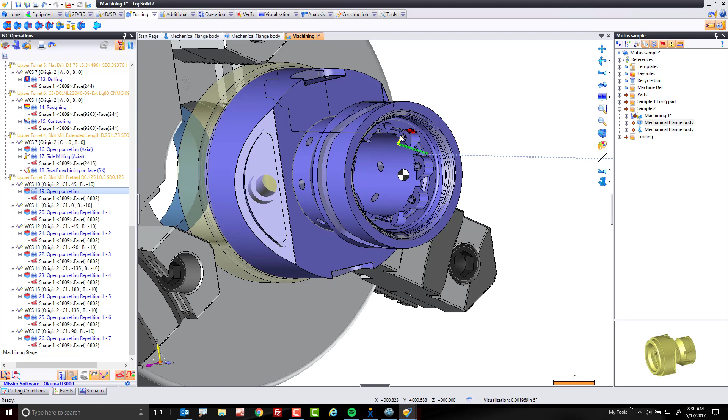Perfect. Okay, from here now, we want to do the drilling on here, but I want to be super clear about something. I want to do the drilling based on starting from the same position, and you'll understand why in a second. So I just turn on the toolpath to mark where I'm working. So I can come over here, go to drilling, go to hole machining. When I go to hole machining, I want to be working at the same 45 B-10 because I want the same WCS, in fact. You can see here the software selected that automatically because I have other operations used for it. Perfect.

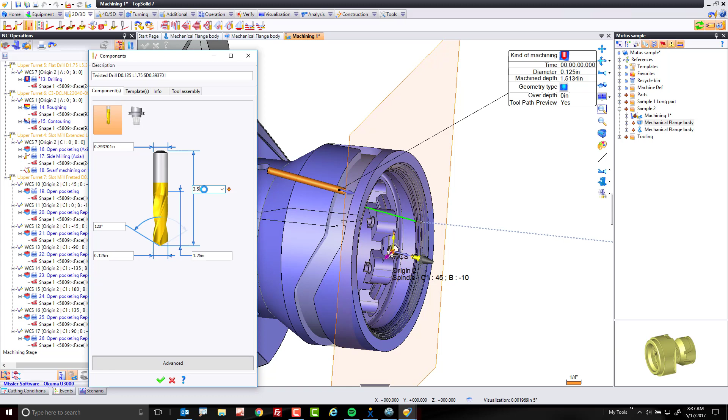Here, I'm going to go to pick a drill. Let's go double click. You could of course do a centering operation, whatever. You guys get the idea at this point. I want my 1/8 inch diameter drill. Perfect. This needs to be, let's say, 1 3/4 inches long that way. Maybe it's a 3.5 inch long drill. I like that. Maybe we'll look at the shank diameter here at being 1/8 inch as well. And we'll say this is maybe 2 inches long. Nice. That looks like that'll be good.

Might have a collision. Let's see if we have a better holder. Let's use an extension holder instead. Probably a better choice. I'm going to double click to make that change. Again, I'm going to make this 1 3/4. I'm going to make this 3.5. Cool. We'll set the shank diameter to the 1/8 inch. Let's set the extension portion of the holder to maybe 3/4. Maybe this is 2 inches long. Let's have a look. Yeah, that's looking better already. And you get the idea.

Now, come in here, we'll set our feeds and speeds. I want this to be 2500 RPM, and I want this to be at 15 inches a minute, jet coolant. I'm going to go into my settings even, and I'm going to set a pecking routine. Why not? So I'm going to come into here, activate pecking, set our peck depth to 100 thousandths. Why not? I like it, and go.

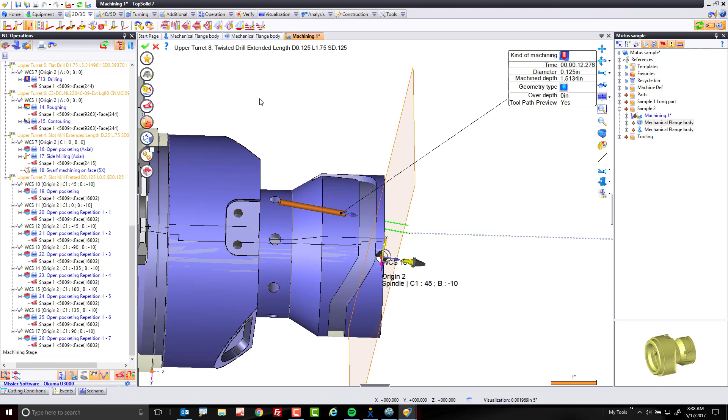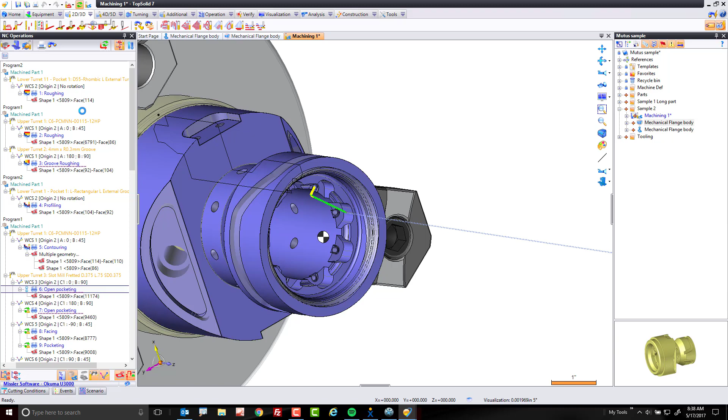Now, here's where the magic happens. Not only did we just drill that hole, because we totally did, but if we look, we just drilled all the other holes as well. The fact that I had a WCS repetition active for that position means that by default, every single toolpath associated with that WCS solution will also auto-repeat, making your programming process even faster. All you need to do is hit the regenerate button to calculate all the repeated features.

All right, we're nearly done with this side of the part. I got some drillings to do and some finish millings to do, so I'm going to go ahead and just finish this part. So I'm going to start by finish milling this. So I'm going to go to side milling. When I go to my side milling, that's going to pick my 1/8 inch tool because that's the last end mill I chose. Maybe we want to change this to be a different tool. Let's use our 1/4 inch tool. Why not?

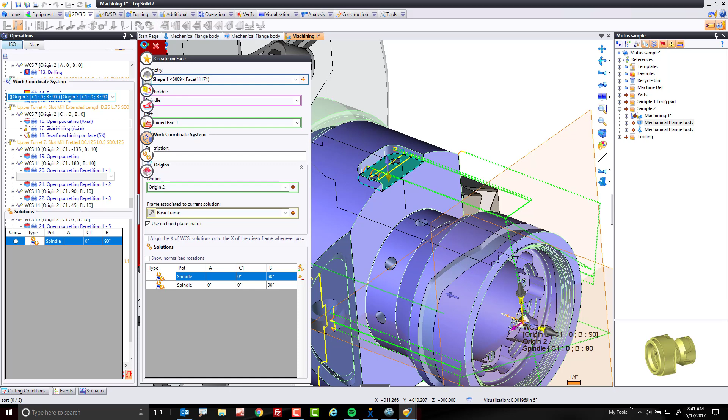Perfect. Let's also go and set the angular solution we want. It's just a little bit confused right now. So let's go ahead and choose Create on Face. Let's choose this. We have our 0, 0, which is perfect. Click OK. And now we have the proper angular solution. You also see here when I do this, it wants to machine back here because there's material. It's normal. Let's just say machine the local feature instead.

Perfect. And then the last thing I want to do is, in one shot, I want to finish the walls and I want to finish the floors. Okay, so how can we do this? Well, we can do this by doing radial passes. I'm going to say that my radial passes here on this tool are going to be worth about 100 thousandths, with the last one being at 20. Why not? I'm going to say take as many as you need. How about I type 10 and see what happens? And here you can see it's just going to take as many passes as is needed on the floor.

Now the other thing I'm going to do is I'm going to play with my lead-ins and lead-outs here, just for giggles and grins again. I'm going to say, you know what, a 45-degree move there is good. 50 thousandths lead-in there is good. Boom, I like it. Let's just be done. And like that, I've now finished that side. And of course, you know where I'm going to go with this next, right?

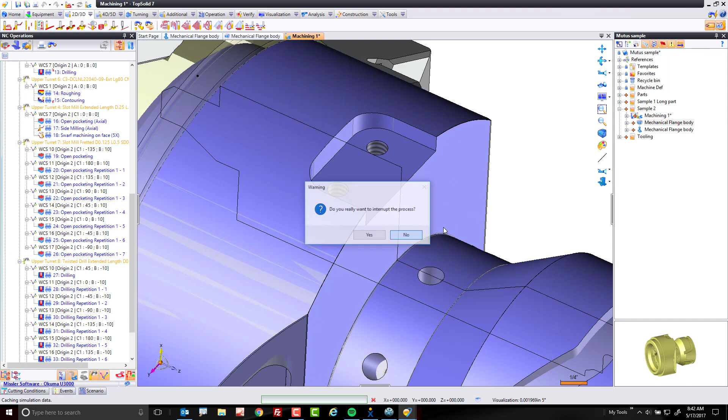Next, what I want to do is I'm going to take this tool path, flip over, and drag and drop it down to this wall here. Why not? It's going to go to the right WCS solution, create the tool path, but again here, went a little far. Again, it's the default nature of TopSolid to try to do everything it possibly can. Ironically, because we're between the jaws here, you suppose you could let it machine back there if you really wanted to, but I don't want to do that. I'm going to switch back to local mode. Perfect, done, move on. Nice.

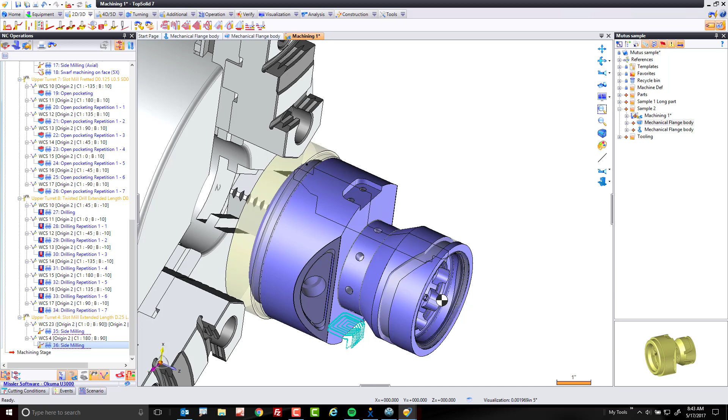You can use these same methodologies to finish these features in here as well. The drillings that you saw me do, same features as well. Okay, so what I did in the past few minutes was I programmed a whole lot more of this part. I just want to review with you what I did. We did this side milling and this side milling together to show you how to finish. And then I just went crazy using the same technologies I've shown you already to machine all the rest of these features. So let's have a look.

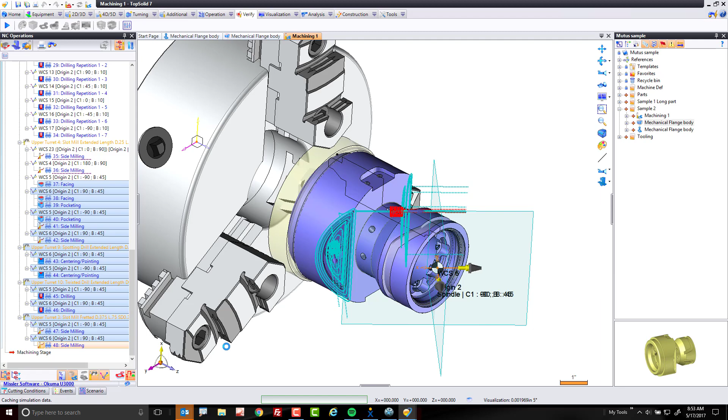I'm going to start from here, go all the way down to here. I'm going to do this within Verify, just so we can see everything, and we'll watch the material removal as well. So here, I'm going to zoom out a little bit. I'm going to hit play. And we're going to see that's going to finish up that face. It's going to pre-position, finish up that face. We're going to finish that pocket floor, finish that pocket floor, finish that wall, finish that wall.

Sweet. Now, next, we're going to center drill. Next, we're going to drill. Notice I'm pecking. Awesome. And then we're going to finish the counterbore using helical contouring. Nice. So those are all those operations, and those operations were done using the same methodology that I've shown you in other videos. And it took me maybe, I don't know, 4 minutes, 5 minutes to do all those ops. Cool.

Okay, the last feature we need to program on op 1 of this part is the radial drillings. So how do we do that? I'm going to zoom up, select a hole, right click, go to drilling just like you normally would. Now to begin with, I'm going to switch to tip drilling. Okay, I already have a tip drill in here. The diameter of this hole is 1/4 inch, and I want to leave a little chamfer on here, so I'm going to set it to 275. This way we leave a small chamfer.

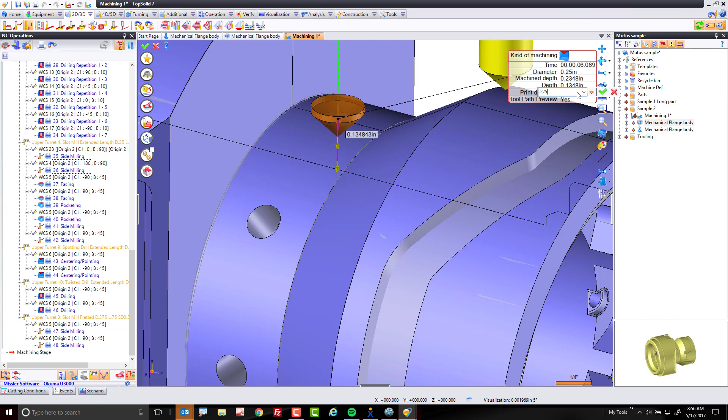Now, how do I get it to find all the other holes? Well, it's simple. You turn on multi-axis. We make sure that we go to 4-axis radial. Then we can go to the geometry button, and we can hit find its brothers and sisters. I'm going to hit no to that. And here, TopSolid is going to automatically find all the other ones. Now, word to the wise here, I'm going to come down here to optimization and force it to always go either C positive or C negative with the rotation. Like that, you've just done radial drilling. The same operation would apply for actually drilling the holes as well. Okay?